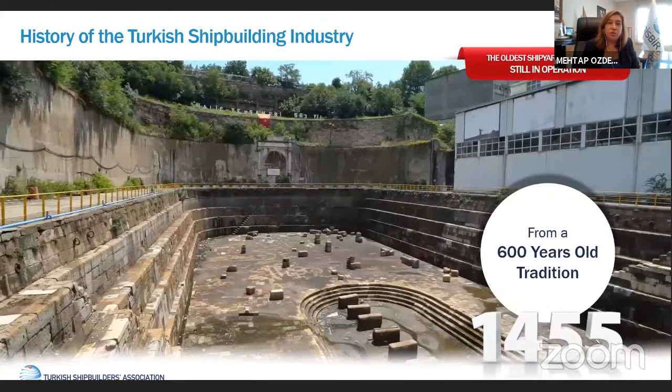I would like to give brief information about Turkish shipbuilding industry. Our history of Turkish shipbuilding industry is based on 600 years ago. This is Imperial Arsenal Shipyard. And our association was founded in 1971. So we can say that we are one of the oldest non-governmental organizations in Turkey.

Now we have almost 100 members. And when we look at our mission and activities, we can say that the improving of Turkish shipbuilding industry, helping Turkish shipyards position themselves in the global market, establishing a bridge between shipyards and relevant authorities, associations, and organizations, and also representing our shipbuilding industry in international and national audience.

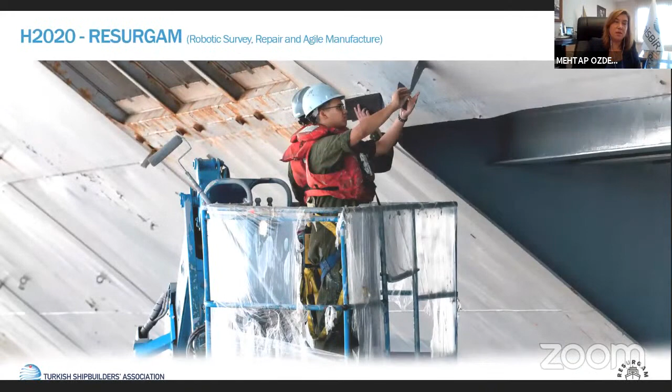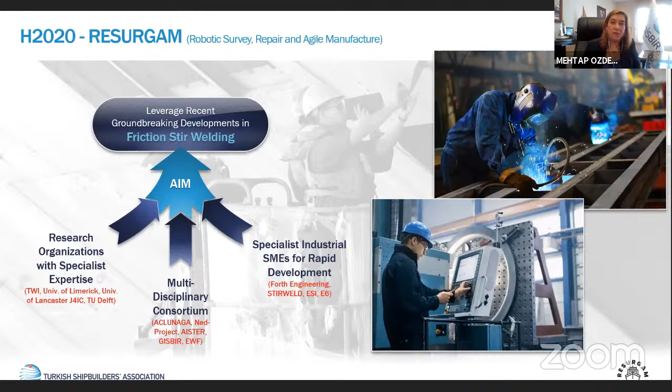And other project is Horizon 2020 Resurgam project. Stefan will give some brief information, I think, about friction stir technology. This project has approximately 13 partners. You can see the names of our partners. And GISBIR is the only Turkish partner in the project. So at the end, we try to develop robotic survey, repair, and agile manufacture systems by using friction stir welding for steel manufacturing.

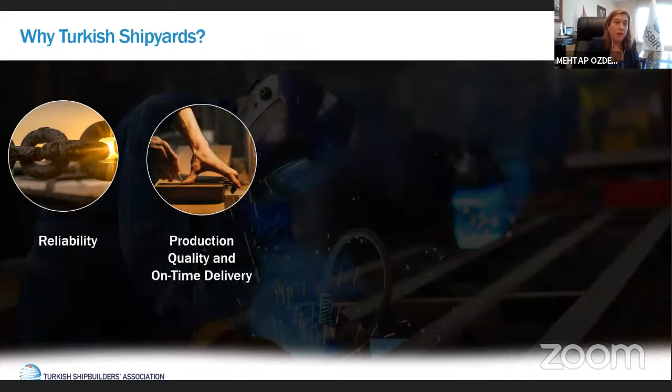We can say that why Turkish shipyards are important for maritime industry. Our members are reliable, and we have production quality and on-time delivery. In Turkey, there are so many authorized equipment suppliers, classification societies. We have good communication between clients and shipyards and high-quality supply chain.

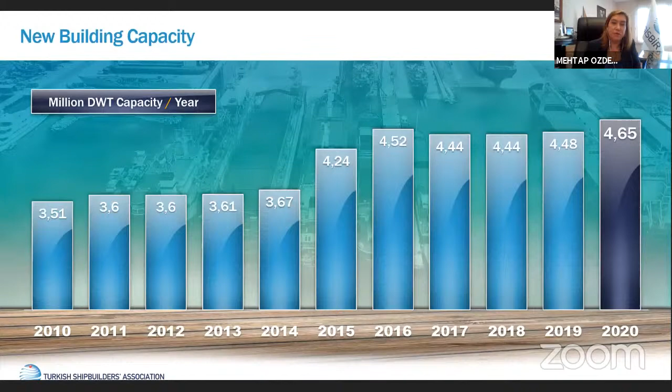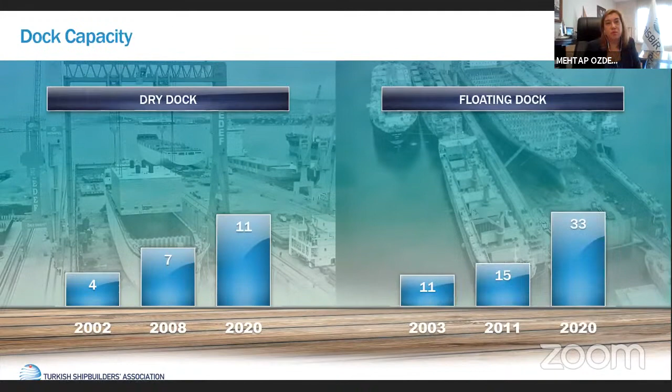When we look at shipbuilding capabilities, our new building capacity is approximately 4.65 million deadweight ton by 2020. And for repair and maintenance capacity, we have 25 million deadweight ton. We have really good infrastructures for repair and maintenance and also for new builds. We have 11 dry docks and 33 floating docks in Turkey. This is one of the biggest floating docks in Turkey and also in Europe.

And tugboats, some of our members are really specialized on tugboats. The world's first battery-powered full electric harbor tugboat was built by one of our members. The other member built the world's remotely operated commercial vessel and LNG-fueled escort tug, and also the world's first advanced variable hybrid tug.

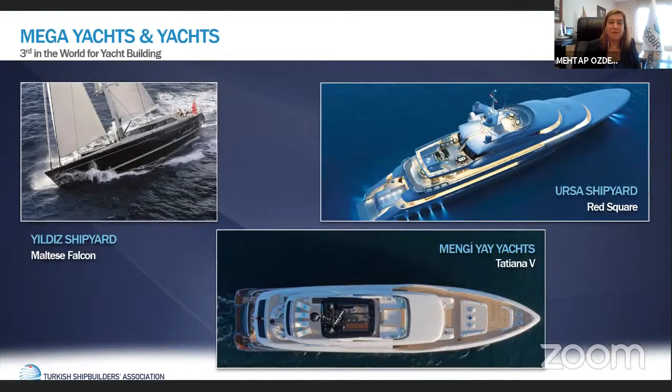And for mega yachts, we are the third in the world for yacht building. We have really good and luxury mega yacht examples.

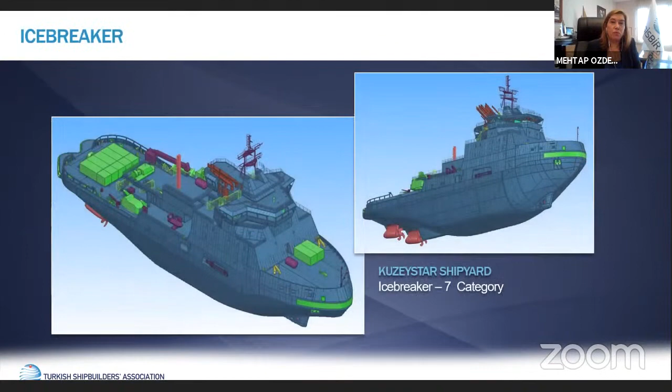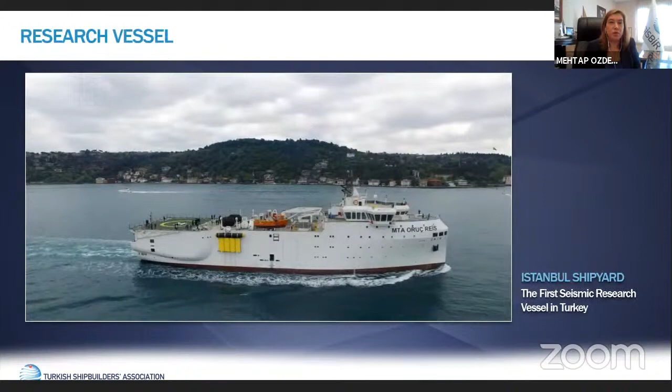And also one of our member shipyards is now building an icebreaker. And this is the first research vessel for seismic research in Turkey, which is built by one of our members also.

As I mentioned before, we are third in mega yacht building, and you can see figures according to the years. As I mentioned before also, we have really good infrastructure, so we are really experienced about repair works and also retrofits.

This is one of the interesting examples, which is a very quick repair within 25 days.

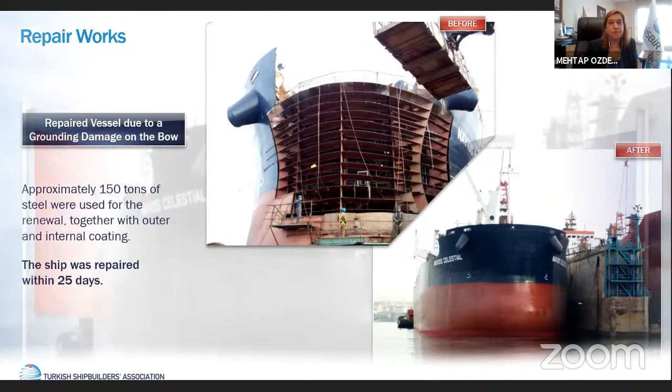As I mentioned before, our Turkish shipyards' clients are generally from Europe. So we have focused on EU requirements and IMO requirements. We are really interested in European Green Deal objectives, and we try to comply with these objectives as an industry. And also we are following up IMO requirements.

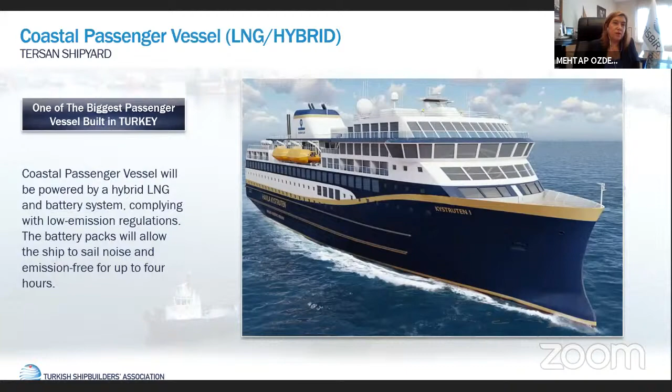And also I would like to say some words about green upgrades, retrofits. Our member shipyards have already finalized more than 350 ballast water treatment retrofits and more than 150 scrubber retrofits in our industry. So we can say that we are really greatly experienced about retrofits.

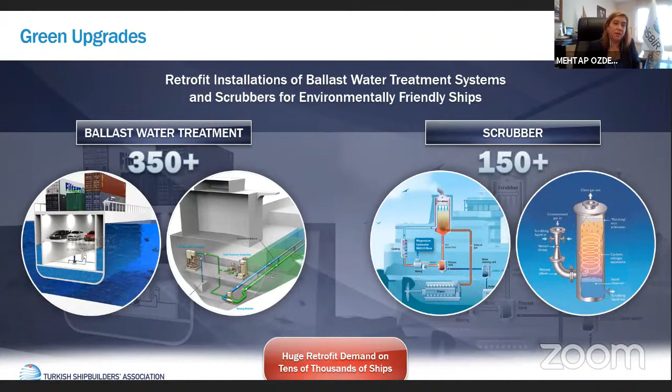And when we look at Navy and Coast Guard projects, we can obviously say that building naval ships increases our experience for workers and also for engineers about building complex ship types. And I try to show some examples of these projects.

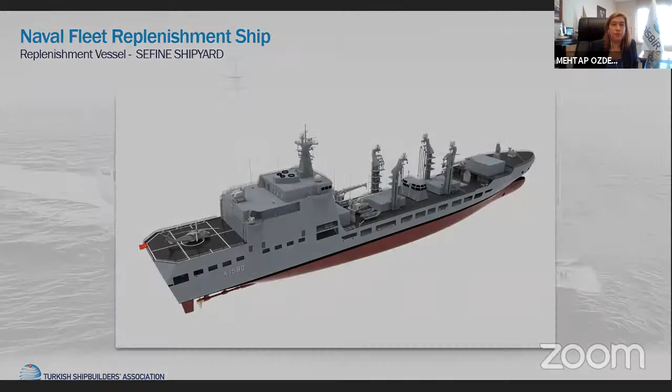I would like to say some words about COVID-19 and the pandemic in the Turkish shipbuilding industry. At the beginning stage, we had a main focus on making some measures about the pandemic, and we prepared guidelines, and I would like to show the results. The main focus is keeping everyone safe.

As GISBIR, we prepared guidelines which include general requirements, working area requirements, cafeterias, and transport areas. We used WHO guidelines, ICS guidelines, and national instructions, among other sources, when preparing these guidelines. We disseminate the guidelines to our membership, and they strictly use these measures.

These are some examples from our guidelines and some measures. You can see some of these measures in our shipyards.

Also, our government developed an application in order to verify whether someone is risky or not. It is a unique QR code application. So we always request our employees and also foreign visitors to show they are not risky by using this app. In the end, we can say that we have managed to control the pandemic situation in shipyards and keep our work sustainable.

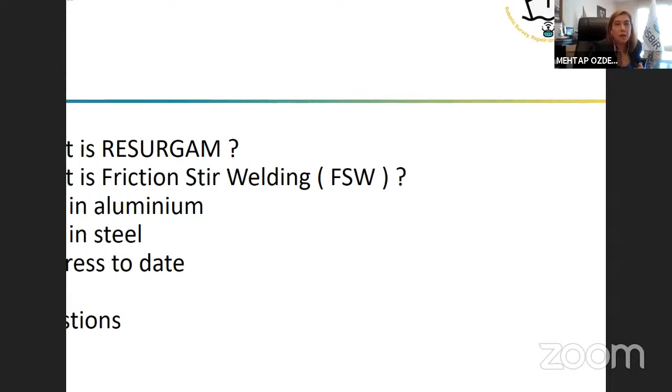Hopefully you can now see my slides. Yes, we can see. So what I'm going to talk about is the EU project Resurgam, which is about developing friction stir welding. To do that, I'll talk a little about where friction stir welding was invented and how it's been used already in aluminium, and how Project Resurgam is now transferring that technology into developing friction stir welding for steel.

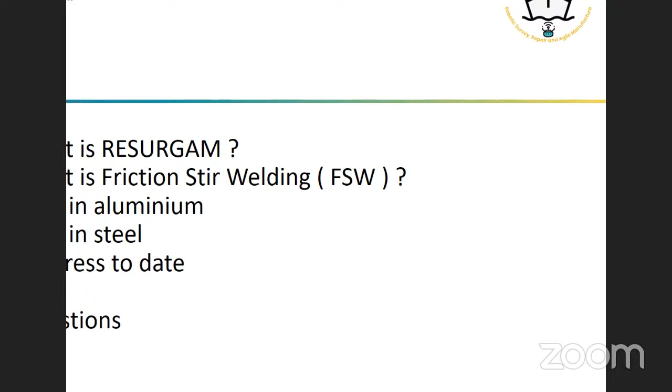Stefan, may I interrupt you? I think your presentation doesn't fit on the screen very well. I don't know why, but we couldn't see some words very well. On the screen, the left side appears halfway, there's a loss. Could you please change it? I'll just see if I can change it. Yes, it's okay now, okay now.

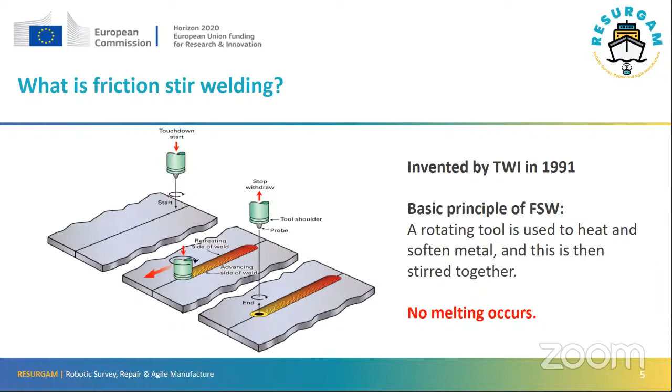So initially, friction stir welding was invented 30 years ago by the Welding Institute, and it's a very simple process which doesn't actually melt the metal. In many ways, it's very similar to milling. What we do is have a rotating tool which we lower down onto the surface of the metal that we're about to join. The rotating tool generates heat through friction, and that softens the metal, and then it is actually stirred together. The important thing is that we don't actually melt the metal at all, so we get a very strong bond.

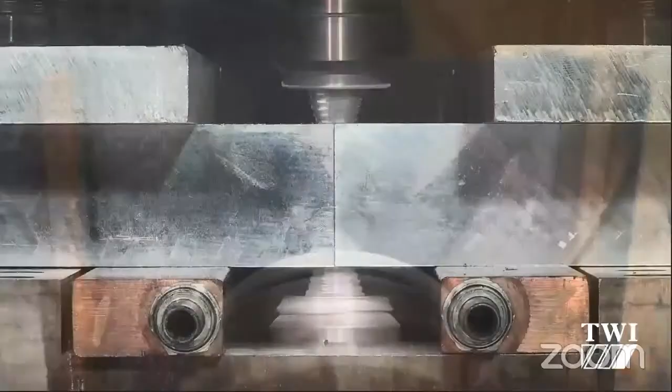This actually shows the process in use. This is a video which shows two pieces of aluminium being joined. The aluminium is 50 millimeters thick, and we're welding it from the top and bottom simultaneously. Because we're not getting any melting, we can weld in any position, including directly overhead. We're seeing the two tools embed themselves into the aluminium. The aluminium internally is now very, very soft, and we can stir it together by moving the tools along through the aluminium. As I mentioned, we can weld upside down because there's no liquid metal there, it's still solid, so we can weld in any position. That also means we can weld underwater as well, because the water does not get into the weld zone.

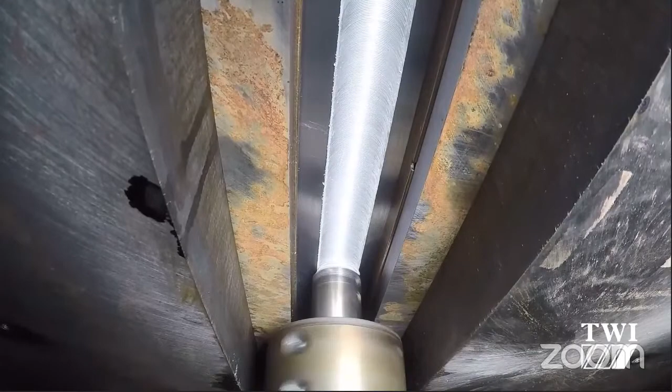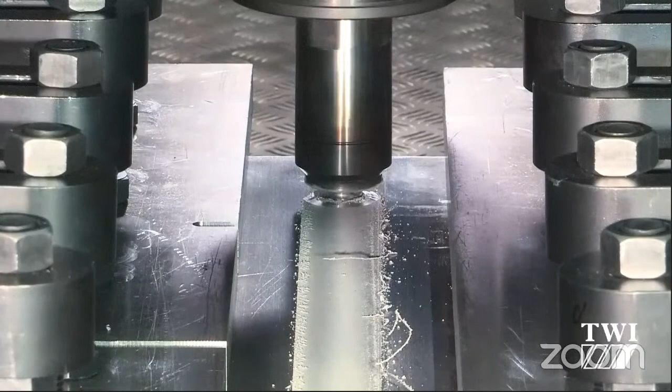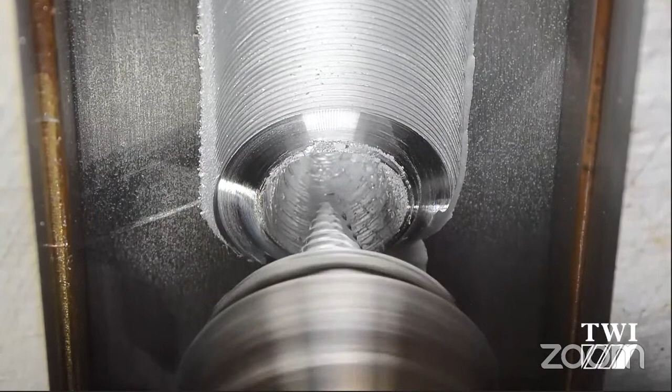As you see, we don't get any fumes, we don't get any sparks, we don't get any ultraviolet. We get a very nice smooth surface finish to the weld. In many applications, it's not necessary to do any post-weld dressing because the surface is good enough to put straight into service. Then at the end of the weld, we simply extract the tool. So realistically, it's very similar to milling, gives an extremely strong bond, it's completely mechanized, and gives very good results.

It's mechanized, it's repeatable, so you always get the same quality of result. We don't need to do any specialized edge profiling or cleaning of the metal before we join it. We don't use a shielding gas or filler wire for joining aluminium, so you've got cost savings involved. We get very little distortion or shrinkage. We're not melting anything, we're not putting a lot of heat there, so we don't get much distortion. We can weld in any position, vertically, overhead if necessary.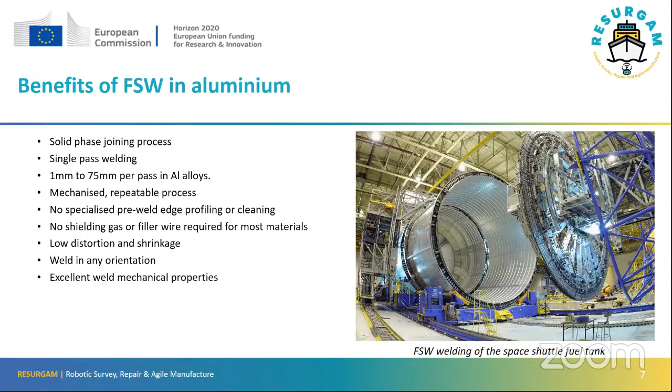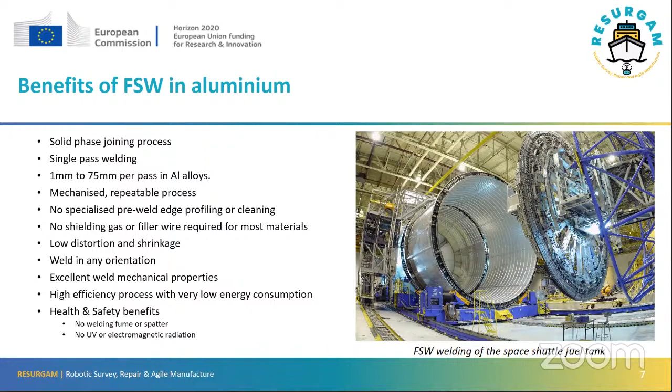We get very good weld properties. We don't use much energy because we're not melting anything, so it's a very energy efficient process. We get health and safety benefits too, because we've no fumes, no ultraviolet radiation, no electromagnetic radiation, so it's a very safe process.

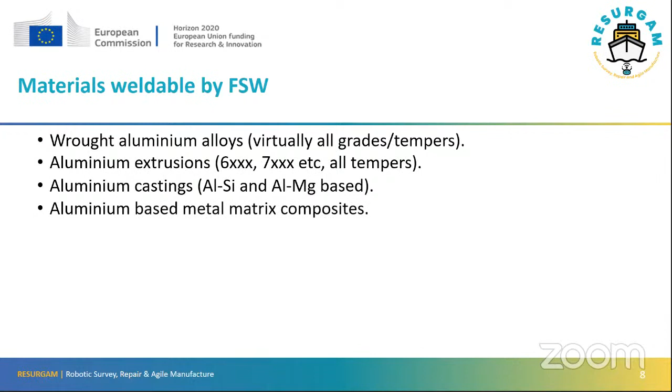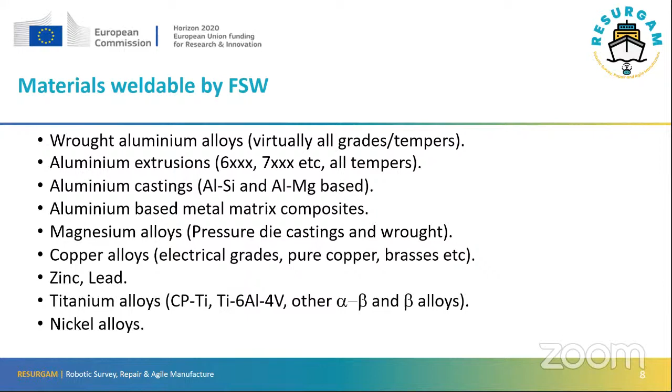In terms of the materials we can weld, the process was developed for aluminium, and it can do any type of aluminium, including grades like 2000, 7000, and some 8000 grades that cannot be welded by arc welding. We can work with extrusions or castings, and we can even weld metal matrix composites. After the process was first developed, we were asked if we could weld magnesium, copper, zinc, lead, titanium, and nickel alloys, and we can weld those materials as well. So it's a very versatile process.

And then most recently, we've been asked if we can weld steel.

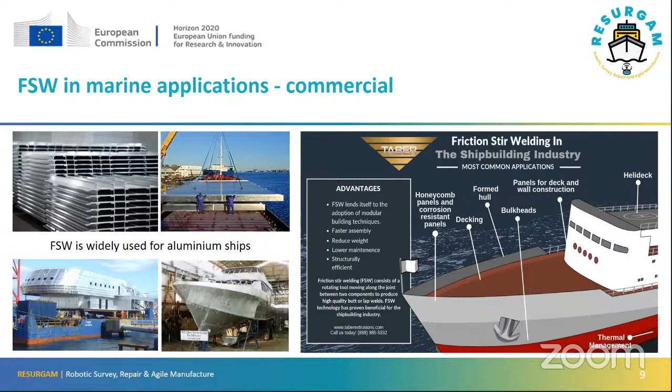Thinking about where it's already being used, friction stir has been used for about 20 years in aluminium ships. There are quite a lot of companies using it, including a Turkish company, and it's often used for modular construction of things like decks, bulkheads, helicopter landing pads. A lot of honeycomb type panels can be friction stir welded, as can cooler and chiller plates. So it's widely used already in aluminium in the marine industry.

It's not just commercial ships, but a lot of military ships use it as well, because it gives incredibly strong, stiff, lightweight joints, which are very resistant to damage.

We've got variations upon the technique which can actually weld through closed sections. For example, it's very simple to use a type of friction stir welding called bobbin welding to join two C-shaped channels to make long tubular structures, such as fuel tanks, masts, heat exchangers, or chiller plates.

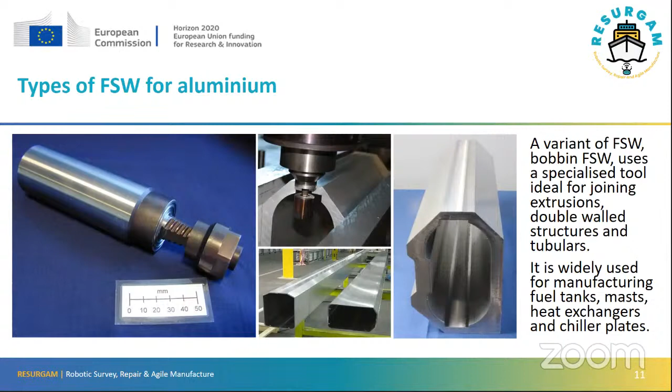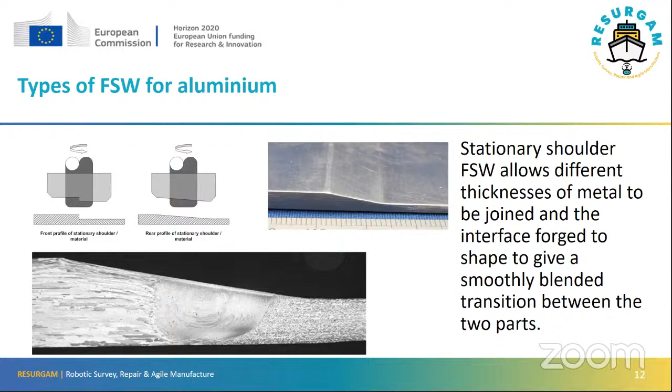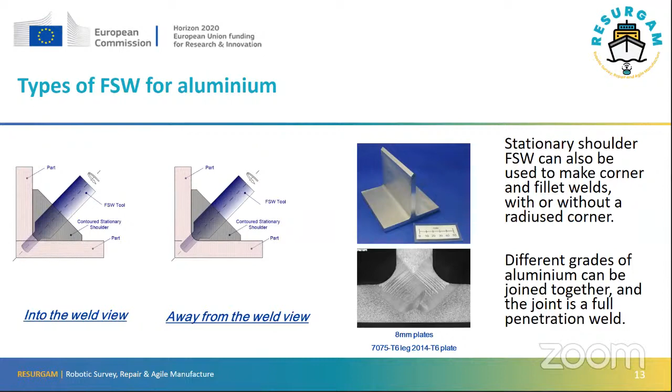We can weld different thicknesses of aluminium together by having a specially shaped tool, which blends the joint line between the two plates and gives a nice smooth transition between the two parts. In aluminium, we can also weld into corners and give a full penetrating joint. Under testing, we find that the failure tends to occur in the parent metal and not in the weld itself.

Because of all these benefits we bring to the process in aluminium, people started saying, could we actually friction stir weld steel? And in particular, could we do that for the shipping industry? This question was first asked well over 10 years ago now, and we've been working on developing the process in a number of projects to try and develop friction stir welding tools for welding steel.

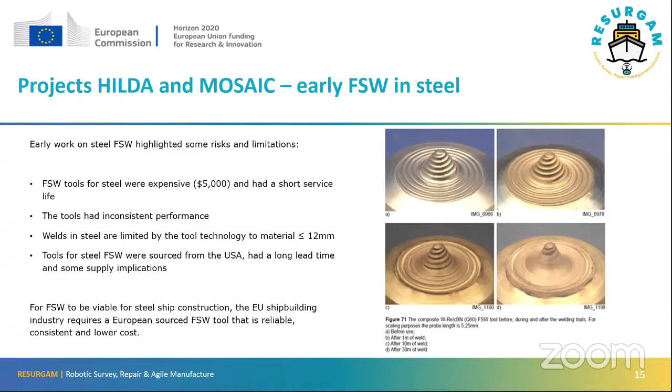The early problems we encountered were that the tools wore out very quickly. They were quite expensive, and they also had inconsistent performance. So we needed to develop a much better tool, and it's taken quite some time to do that.

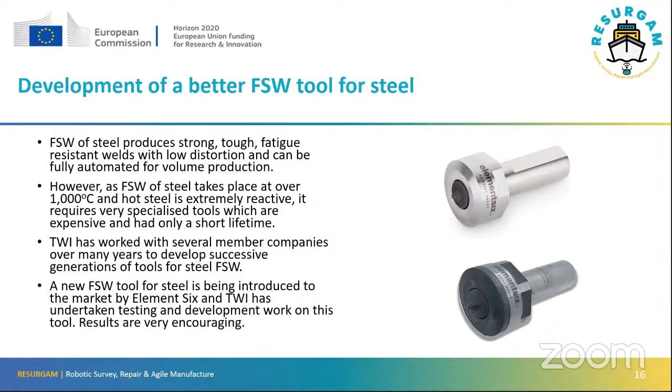But we've now been working with a company called Element Six, who are developing some new tools, and these are just coming onto the market, suitable for welding steel. The problem with welding steel is that we're working at over 1000 degrees centigrade, so it's still solid, but it's very hot, and we need tools that can be very strong and withstand working in steel at those temperatures. We've now developed tools like that, and I'll show you a small video of some friction stir welding of steel.

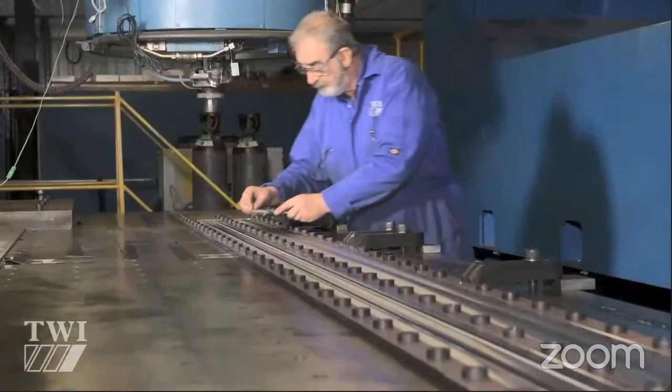The tools themselves last quite a long time, and you'll see in a moment that even after welding many meters of steel, the tools haven't worn. This particular tool has welded over 40 meters of steel and is still in good condition.

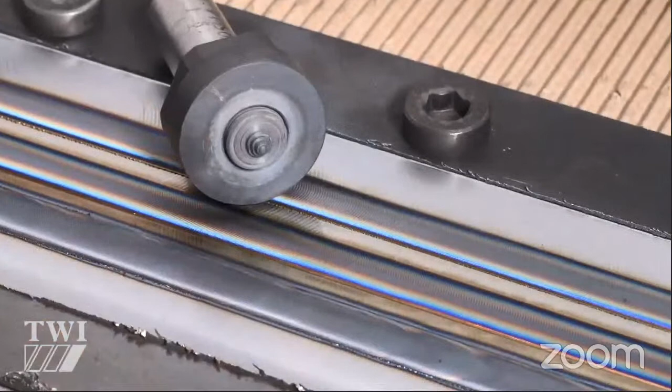So it's a very simple process and is now possible in steel. In terms of the different grades of steel that can be welded, we're finding that we can weld almost any grade of steel because we're not melting anything, we're not changing the composition. So even some grades of steel considered very difficult to weld by conventional techniques, we can weld by friction stir. For example, we can weld a carbon steel to a stainless steel without problems.

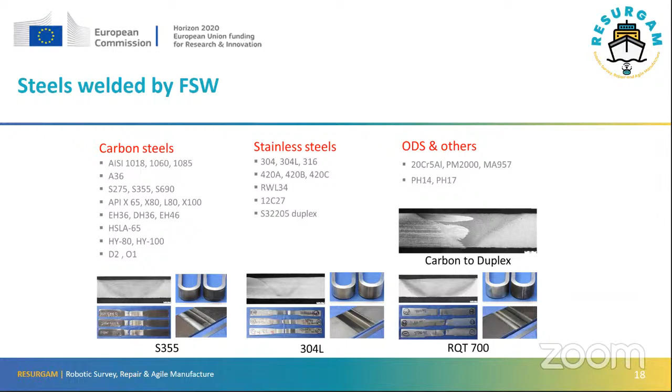In terms of the weld properties, those are very good. On the left-hand side of this slide, you'll see some tensile test pieces, and all of those have broken in the parent metal and not the weld. So the weld is actually stronger than the parent metal.

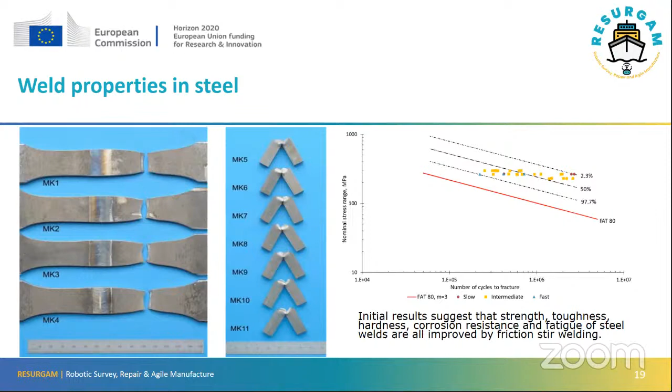So we've been tasked under the EU project Resurgam to take this process further and develop it for two particular applications. One is to use the fact that we can weld underwater using friction stir, and to develop a robotic system which can carry out repairs on marine structures without needing to dry dock them. So the repair can actually be done at sea by a robot.

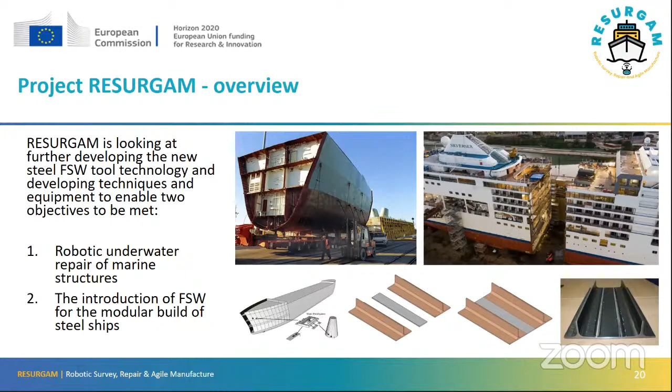The second task is to make use of the ability of friction stir to make joints with very little distortion, so that yards developing modular construction techniques, or inserting plugs into ships to lengthen them, can weld using friction stir. Because there's no distortion, everything will fit very well together when the final ship is assembled.

So the project itself is split into different work packages. The Welding Institute and Element 6 are developing the tools that do the welding, and the quality of those welds will be assessed by the Technical University of Delft in the Netherlands. We're getting a lot of input from shipbuilding associations, such as GISBR, on what grades and thicknesses of steel are needed, and the kind of applications this will be applied to. So we're getting a lot of help from the member shipyards of the Turkish Shipbuilding Association.

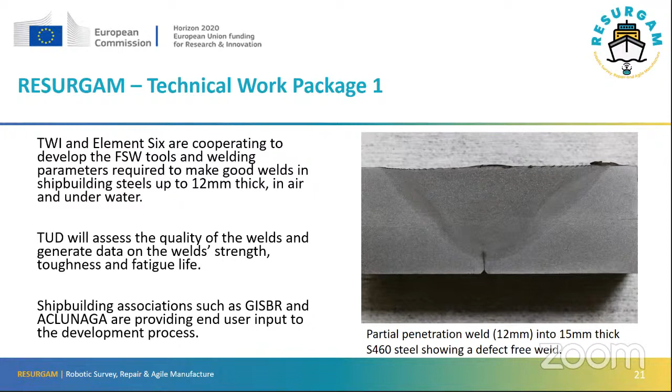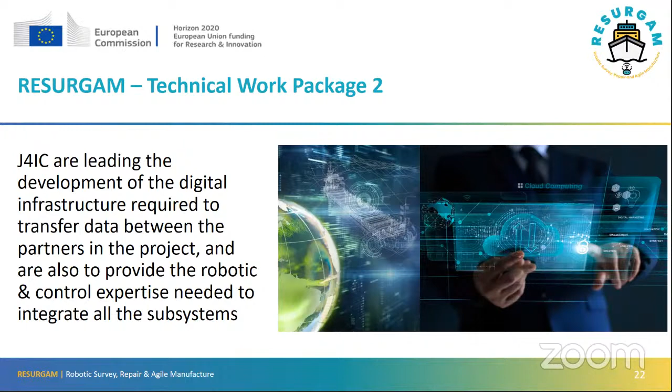The second work package is being led by J4IC, who are developing all the digital infrastructure needed to send drawings of ships around, repair plans, modular construction plans, and also to develop the control software which will control the friction stir welding systems and integrate all of those together.

The third technical work package is the development of an underwater robot that can actually crawl along a ship and weld a repair patch in place. Obviously this does have potential other applications as well - it could easily be doing work on wind turbine towers at sea, or any marine structure at sea underwater. This project element is being led by a company called Forth Engineering, who have a lot of experience in robotic systems for use at sea.

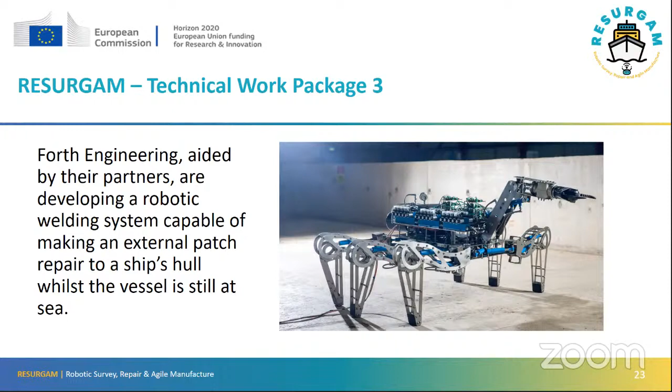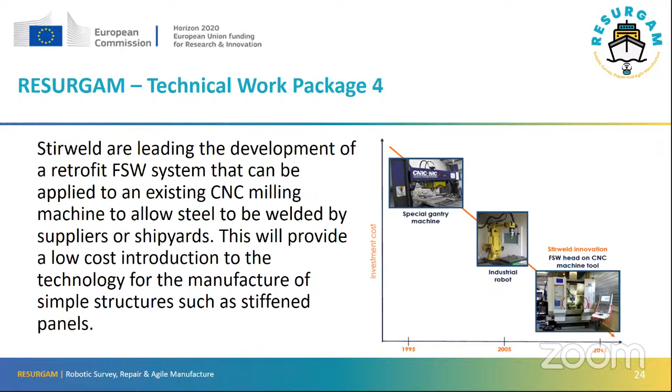The second strand of the project, developing friction stir systems for use on land so that shipyards can undertake modular construction, is being led by a company called Stirweld, who are developing a friction stir welding system that can actually be fitted to an existing CNC machine tool system. They're already finding a partner in Turkey that will help them do that and allow companies to adopt friction stir at relatively low cost.

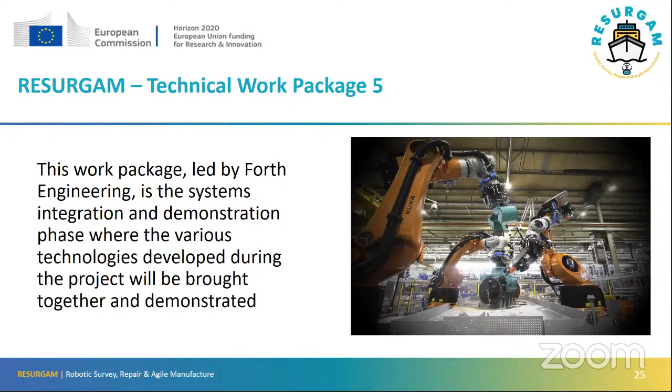The fifth work package is again led by Forth Engineering, and this is where all the systems will be brought together, integrated and demonstrated, and this will take place in about 2 years' time. And we're getting a lot of help in the project management and dissemination from the European Welding Federation and the shipbuilders associations such as GISBR and ACLUNAGA.

We very much welcome input from member companies of GISBR and the Turkish shipbuilders in general. We would love to know how you would like to apply this technology and how we can make it better for you.

So that concludes my presentation about friction stir welding as a technology and the Resurgam project. If you have any questions, I'll be very happy to answer them later on, or you can email either myself at TWI or the project coordinators, the European Welding Federation, and ask us as many questions as you like later on. So thank you once again for listening. Thank you very much.

I would like to thank Stephen Carter for his presentation. I think your presentation will be very useful for introducing the method to our industry.

Meanwhile, I completed my PhD study on joining of steels used in shipbuilding with friction stir welding. In this welding method, as you said, the energy use and harmful emissions during the welding are very low because the joining is done quite under the melting temperature.

I think this time we managed to attend and continue. First of all, thank you for inviting me. I am here to represent Turkish shipyards, and I would like to show some examples about how extraordinary projects we are working on, building, and planning for the future.

Actually, there are some slides in this similar to Mrs. Mehtap's, but as for technical questions, I can help you if we finish this presentation.

Business is not usual for us nowadays, because in the 10 years after the period of tankers and bulk carriers, Turkish shipbuilding industry and engineering philosophy has completely changed, and we have changed our mentality to unique vessels, niche vessels, and we are really courageous in this regard to build one-of-its-kind vessels in the market.

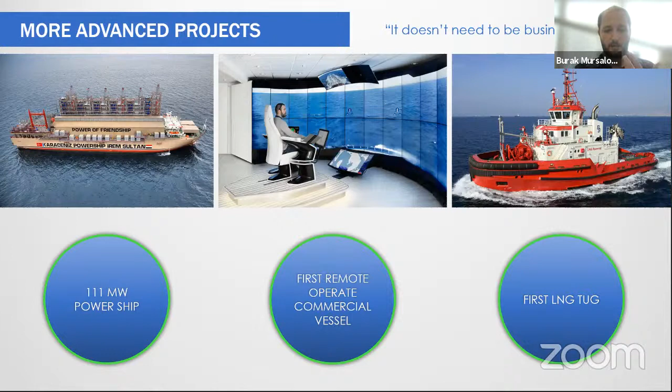As you can see, these power ships, remote operated commercial vessels, first LNG tugs, and first hybrid service operation vessels, Maltese Falcons - these are completely different from each other in perspective. As a shipbuilder, all of them have significant complications, but all of them have been delivered in very good cooperation, and it's working nearly perfectly in the market.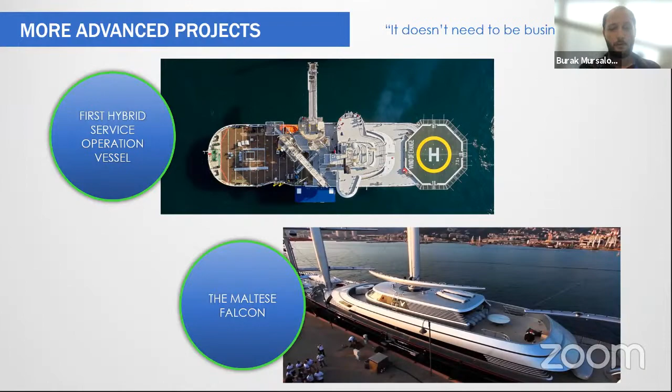While we are discussing the era of 10 years, this is a challenge for us. I think the Turkish shipbuilding industry also changed its mentality in this regard, and the market changed its mentality too.

First, we started to find reducing fuel consumption by making some arrangements. Then we tried to use alternative fuels, LNG, low sulfur marine gas oil - it's getting popular. But after that, electric came to our minds as clean electrical energy, and we have combined in lots of projects diesel electric, this fuel and clean electric energy together. Now, day by day, battery applications and fuel cell applications are growing.

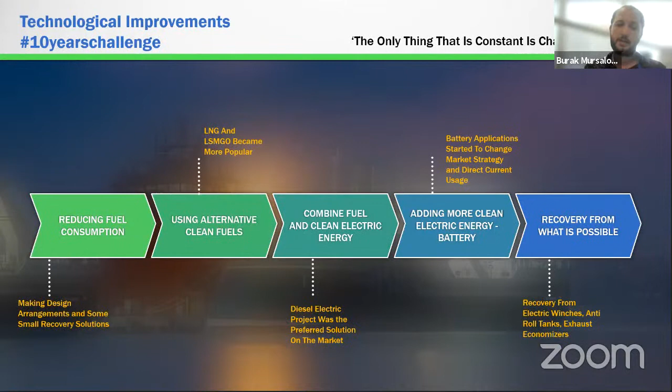Of course, it's coming there. But we are also following the small items which can save energy, like electrical winches, anti-roll tanks, exhaust economizers. There are several kinds of small items that can contribute even less, but it's important for the future and for energy saving.

While doing that, Turkey has a significant advantage because we are in the middle of all building activities, and we have several good shipyards to build, especially some size complex vessels. We have a strengthened competence about fishing vessels, any type of fishing vessels, and nowadays, offshore mostly wind segment, and I think we are the market leader for ferries. Also, especially the tugboats, definitely.

With this regard, the Turkish shipbuilding industry is answering the demands of the customers with some advantages. And engineering, one of the good things, I have been in this business 10 years and I see what has changed in engineering. Firstly, the customers were coming to Turkey just for price issues, but now even when we are more expensive than some other European countries, they are selecting us because of our engineering facilities.

And of course, when you have a good engineering team, the timely deliveries are coming afterwards, and this is affecting the ship owners very much. The flexibility, I think, is the most unique function of shipbuilding industry in Turkey.

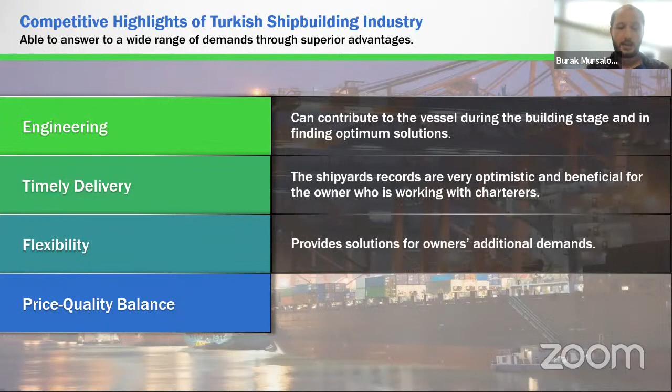This flexibility, we are trying to find alternative solutions to owners, trying to find energy saving or reducing the cost, or operationally, trying to find alternatives for them, because some of the vessels we have really good track records and we are learning a lot about the vessels. I think we can say we are the best in price quality balance, if you think about that, in Europe, maybe in the world, in some segments.

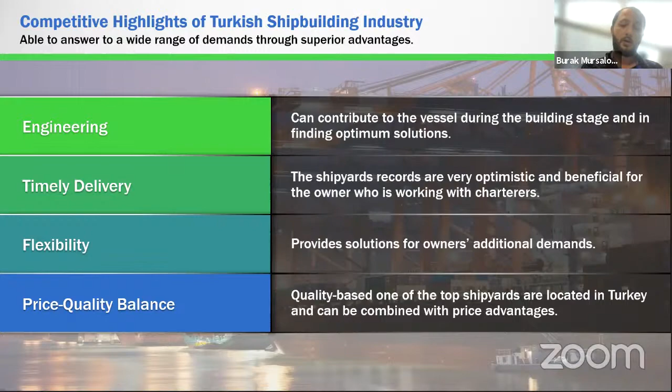That's why this is our highlight, and we have a huge tradition as a shipyard capability, but now I've seen more than 80 shipyards in Turkey, and they are not all ready for the future, and we have to prepare ourselves for the future. We have to follow the technological improvements and learn to build multiple type shipbuilding capability. We should have a suitable infrastructure, and this is one of the important criteria for Turkish industry. We have to keep our engineering philosophy, our engineers, and keep or extend our know-how capability.

And of course, we are doing mostly with European customers, as Mrs. Mehtap mentioned. We have to follow the quality and environmental standards. I think most of the good shipyards in Turkey have already standardized themselves about these certifications and the experience-wise or working philosophy.

Also, one of the important things in this regard, as I mentioned, we have to prepare ourselves for the future, and we have to increase our strategies for future. For that, we have to improve our local sub-suppliers. For example, like cruise vessels, we have to increase our local sub-suppliers to increase the facilities.

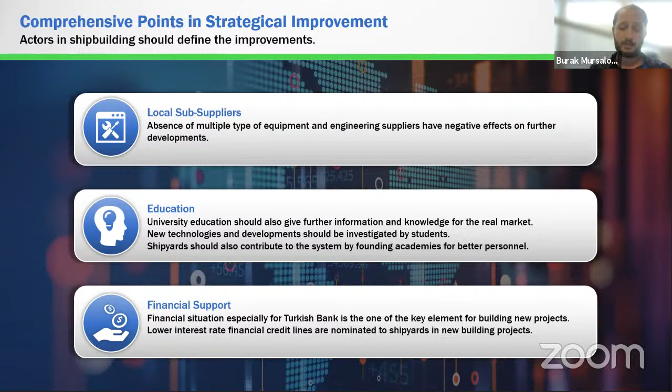And of course, in this regard, the finance is everything. Now our government and banks are supporting us, and we are trying to find new alternatives, new financial supports, because at the end of the scenario, this is a business, and we have to think about the business case as well, for shipyards and also for the country.

We have to believe that as a shipbuilder, and our fellow friends think the same. In this market, there are lots of ups and downs. In Turkey, we saw a tanker and bulk carrier era, but now everything has changed.

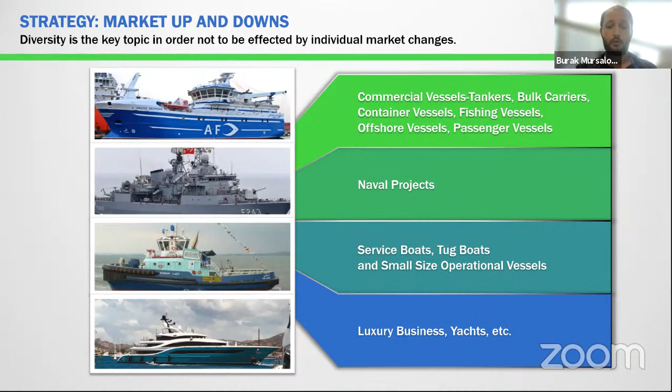That's why we have to prepare ourselves, as a market and also as a shipbuilder, for different kinds of vessels. We can learn from each one of them, and we can implement the learnings in different vessels as well. This is good, to build different kinds of vessels, and we have to not underestimate the effects of technology.

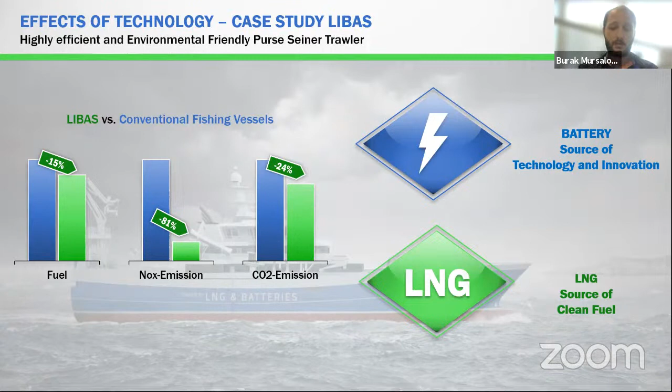I would like to show information, one case study of Libas. As I mentioned, this is the first purse seiner in the world using LNG and battery together. At the same size vessel, the carrying capacity improves, fuel use is 15% less, NOx emissions are down 81%, and CO2 emissions are down 24%. That is a highly unique advantage. And this vessel is under operation now, and the numbers we have received are actually better than this result, especially the fuel and CO2 emissions.

Also, we have to follow some unique projects. I would like to give information about the Norwegian ferry fleet. I think in Turkey we are very much in favor of this Norwegian ferry fleet replenishment program. More than 60% of the ferry development has been built in several shipyards in Turkey. With these projects, we have learned a lot about battery configuration and electric hybrid solutions. Also, these vessels have energy promises to their governments, that's why they are trying to recover all the energy from every possible system. This is also highly advantageous, as we are learning the systems as shipbuilders and engineers. Nowadays we are trying to contribute to these projects, even though they are the market leader in these technologies. We are trying to find and contribute as engineers how we can make much more eco-friendly vessels together.

As I mentioned, the technological improvements are based on the clean earth effect. Everybody should remember that, and we have to prepare ourselves for the future with alternative fuels like hydrogen and methanol. The first hydrogen ferry from the Norwegian fleet has already been delivered, for example. There are some methanol projects in the market, and I think it's increasing day by day. Also, subsystems like fuel cells and hydrogen cells are being used in so many projects, but we need to study, and maybe we need to produce this kind of cell technology ourselves as a country.

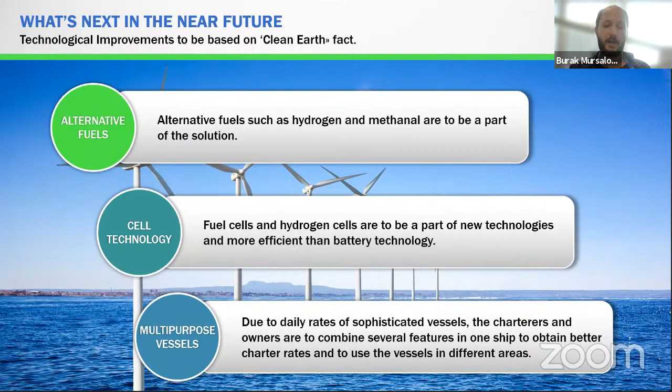Also, what we are seeing due to daily rates is that sophisticated vessel owners are trying to combine lots of different aspects into one vessel. For example, we have one fishing vessel with DP2 capability, because most of the time it will work as a fishing vessel, but owners would like to have the option that sometimes they can use it as a tanker or hire it to other people. That's why we believe this kind of multi-purpose vessel in offshore and fishing will increase.

And what we have to do for the technology is be part of the technological revolution. As Turkey, we implement very well, but we are not a producer. We have to produce something in terms of the technological matters. We have good electrical companies, electrical integrators, accommodation companies, accommodation integrators, but as a base product, we do not have sufficient capacity. We have to be careful on that side.

We are working with Europe, and our government also has new policies about this clean earth effect. That's why as people, as engineers, and as shipyards, we have to follow the regulations as much as possible. And of course, research and development departments are very important. We have to investigate, arrange budgets for that, and we have to support our universities, definitely. One of the important things is that we always try to catch the trends.

Turkey is a trending place for so many types of vessels across different eras. For example, from 2005 to 2009 was a tanker and bulk carrier season. Now we are talking about passenger vessels, offshore projects, and now we are in the era of fishing projects. That's why Turkish shipyards and the market should also follow the trends, what is coming and what is going on. That will guide our future improvements.

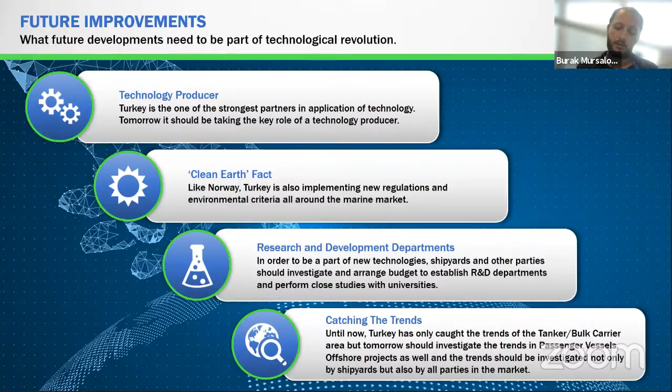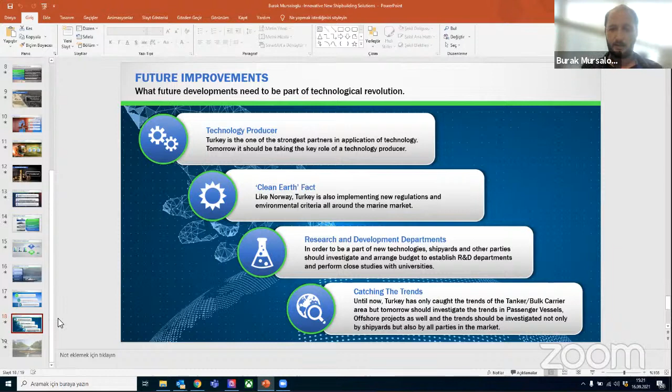I think my slides are finished. Thank you very much for listening to me. It was a pleasure. If you have any questions, I am ready to answer together with Mrs. Mehtap.